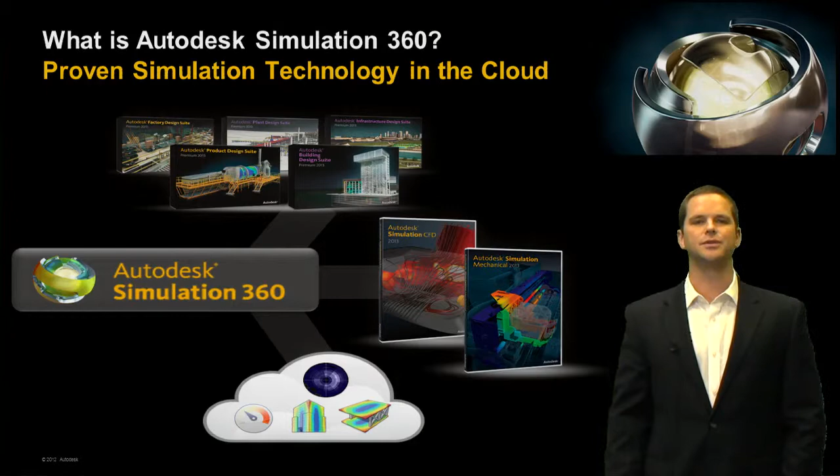So Autodesk Simulation 360 connects to our design suites and to our optimization, energy analysis, and structural tools. But we'll focus on this for this episode on Autodesk Simulation CFD Motion, which is our highest level CFD solution, giving you flow and thermal studies, radiation, smoke, and also flow-driven motion and motion-driven flow, and our Autodesk Simulation Mechanical solution, which gives you linear and non-linear stress analysis as well as fatigue and mechanical event simulation.

So why do our customers use simulation, and why do they use Simulation 360? Well, it's all about gaining a competitive advantage. So we've democratized simulation in order to level the playing field, and by using infinite, elastic, flexible, and scalable computing power within the cloud, we've placed optimization within the reach of the masses.

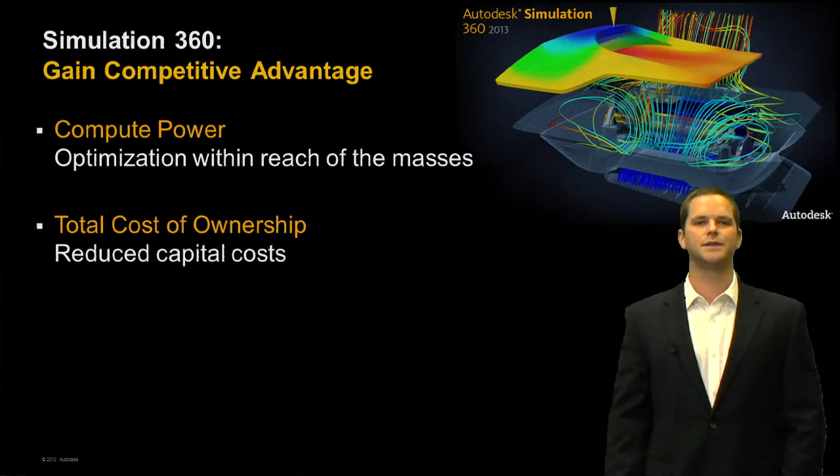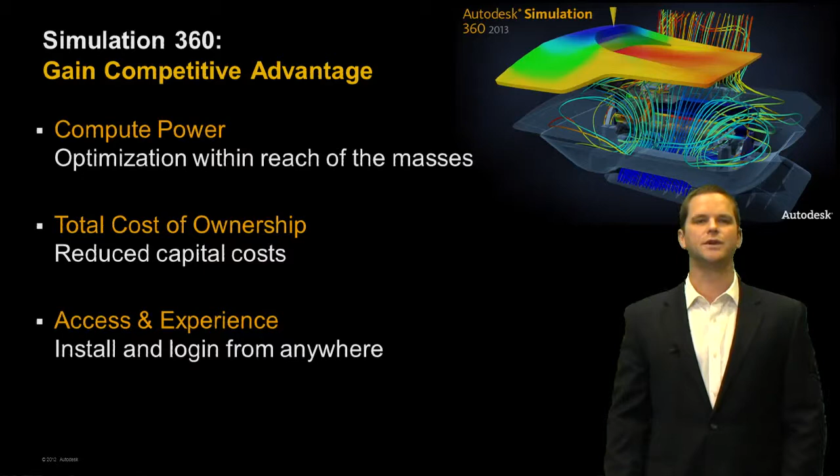It also lowers your total cost of ownership dramatically. So we're helping our customers reduce their capital costs and migrate to a more pay-as-you-go style model. So again, it's all about the access. And lastly, the experience and the access, being able to install and log in from anywhere, is something that our customers expect and demand. So this gives you that capability as well.

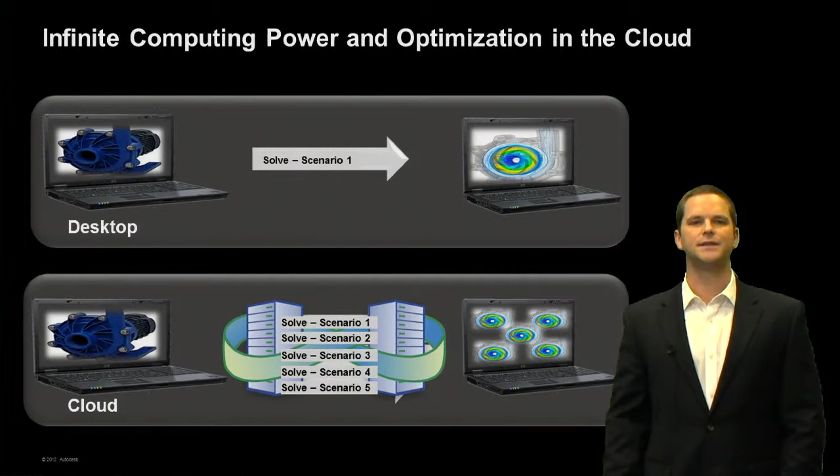Okay, so what is infinite computing power and optimization in the cloud, and what benefits does it provide you? Historically, our customers have run a single desktop simulation, looked at the results, run another one and compared them. Well, now you can run an unlimited number of design scenarios simultaneously. So you're essentially stopping the clock on time to market or time to project completion and evaluating an unlimited number of designs, choosing the best one and moving forward.

So one of the most common questions we get is, how is my data protected? Of course customers want to understand what type of protection measures are in place to protect their intellectual property. So there are three main pillars, and I'll cover this at a high level, and then we'll have an additional episode that covers security in detail.

The first pillar is information security. This is how we protect your data while it's in transit, moving to and from the cloud, and also how we safeguard any static data that's stored on the cloud servers. With simulation, none of the data is stored on the cloud servers unless you choose.

The second pillar is physical security. This relates to the physical safety procedures for the building. It includes protection from theft, vandalism, and natural disasters.

And the last pillar is operational security. It's procedures in place to monitor anyone who has access to the cloud server, with very strict security protocols that they have to follow. Ultimately, we're using the ISO 27001 standard, which is the exact same standard with audit capability that banks and lending institutions use. In addition, we're using the HTTPS secure protocol.

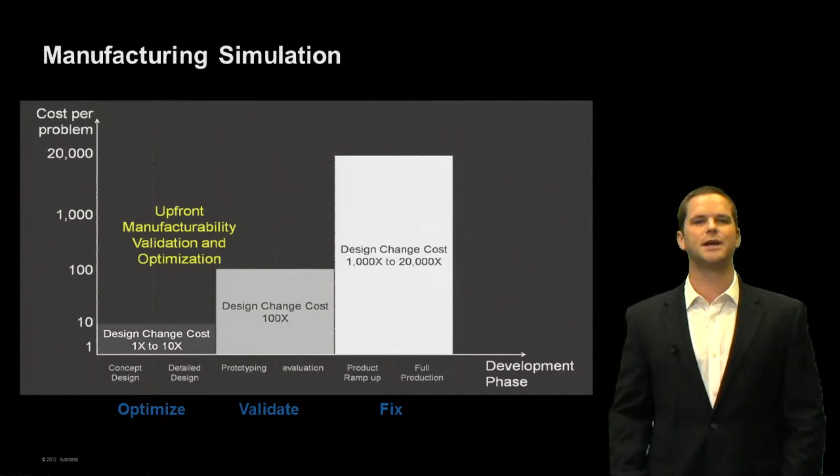Okay, so now let's look at some customer use cases and understand why our customers use simulation. On the manufacturing side or product design side, it's all about the upfront manufacturability. If we look at this bar chart, as we go from left to right, the cost of design changes increases logarithmically. So we want to enable our customers to make design changes upfront and early in the design process when they're the least costly and the most impactful.

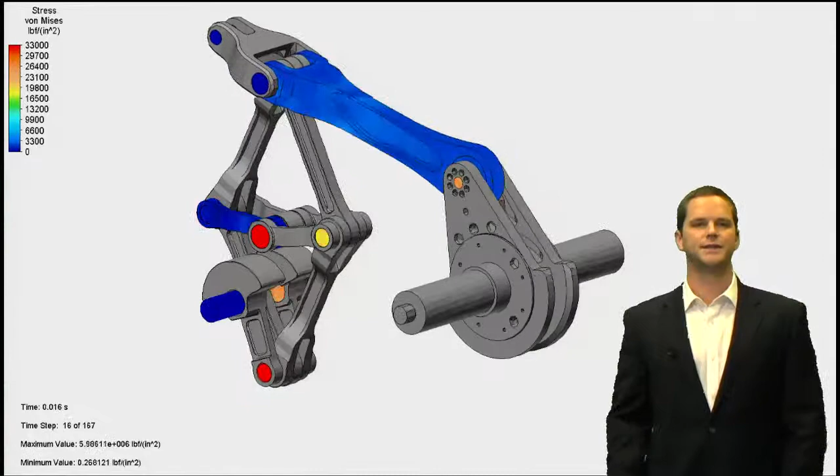So let's take a look at a specific example now. This is a linkage gear which translates rotational motion into linear motion. In this case, Simulation 360 can be used to run many different design studies on this very computationally intensive type of simulation simultaneously. Historically, again, we'd run one at a time. Now we can look at different materials, different designs, different rib sizes, and even different speeds and frictional loads to make sure that our design performs as expected.

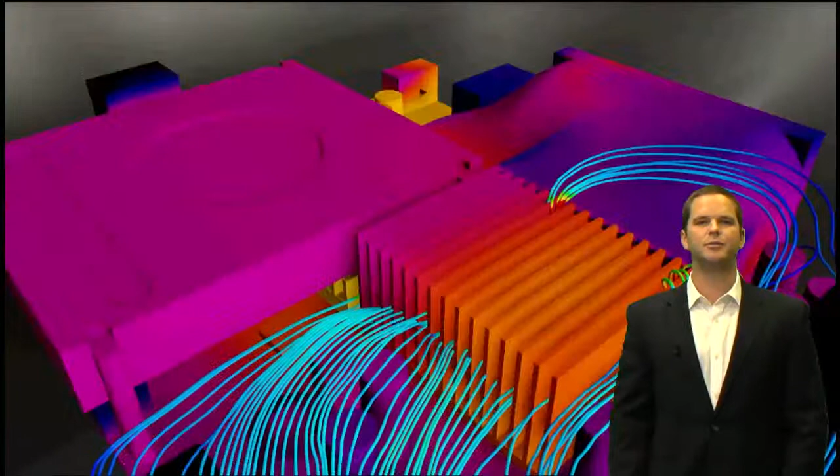How about on the electronics side? In this case, we can use Simulation 360 to understand the effect of different inlet or outlet placements, different fan sizes, varying the heat sink fin spacing or heat sink material, evaluating different chips, and placement of components within the box. So we're using Simulation 360 to evaluate wildly different design concepts and drive down the junction temperature of the chip to increase reliability and reduce risk.

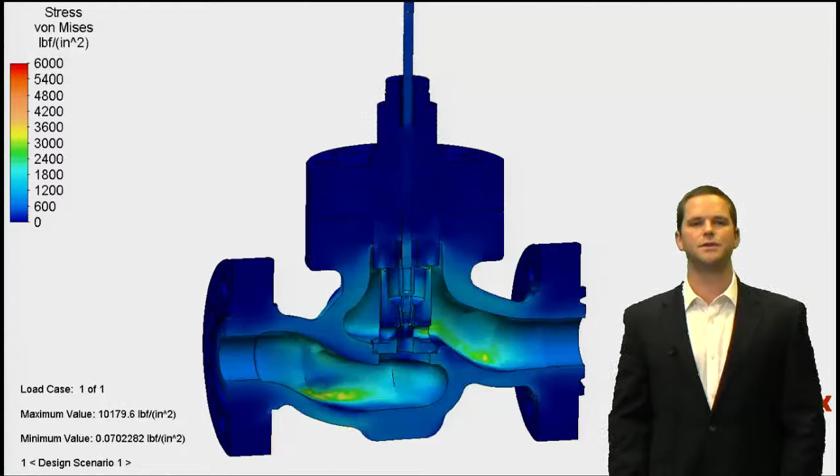On the industrial machinery or flow control side, we can look at pressure tests or burst tests of valve assemblies, or look at stresses on pump components. So in this case, we're using the cloud, or Simulation 360, to study the effects of different pressure loads on the fluid moving through here, different wall thicknesses or material types, and maybe even evaluate the effects of erosion. That's more on the manufacturing and product design side.

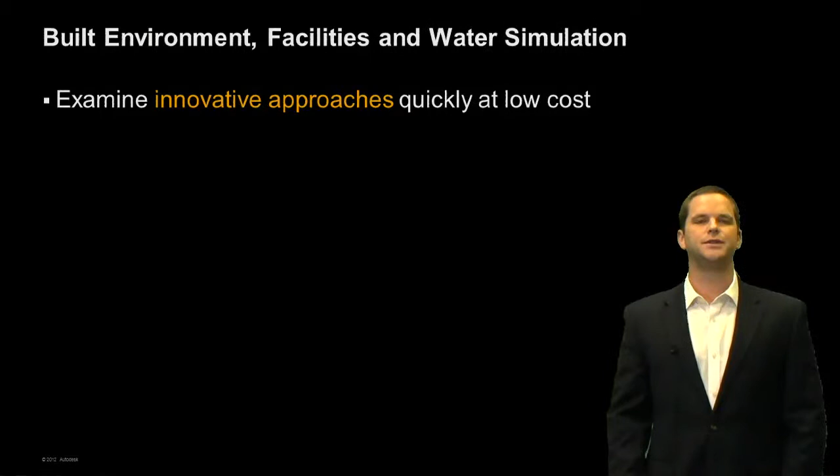How about our clients working in the built environment, designing facilities, water holding tanks or storage facilities, or providing services to their clients? They use simulation to examine innovative approaches quickly at very low cost. At this scale, it's impossible to build and test, so digital simulation is the best method for optimization. They also use it for high-performance, sustainable building design, whether it's saving on ventilation costs, increasing safety, mitigating environmental impacts, or looking at seismic or wind loads on a building, facade, or curtain wall.

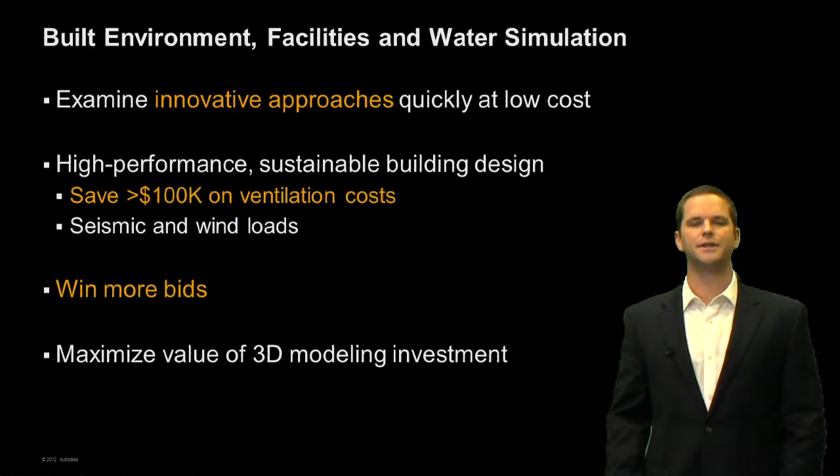They also use it to win more bids, so when they go into bidding competitions, they'll differentiate themselves with this core competency and technology. And lastly, maximizing the value of the 3D modeling investment they've made. So no matter what BIM or CAD tool they use, they'll use simulation to recycle or leverage that data. Here are some more specific examples.

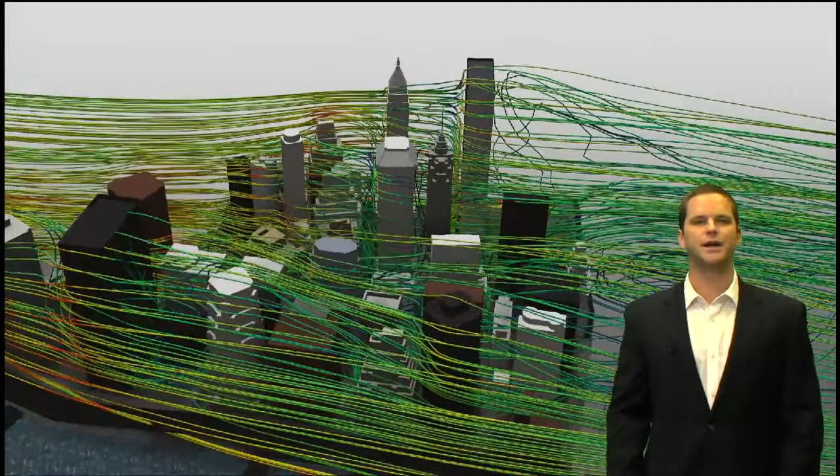This is the financial district in downtown Manhattan. In this case, we could use Simulation 360 to look at varying wind speeds or wind directions. If you look at a wind rose, there are several prevailing wind directions and speeds for each throughout the year. So we want to look at maybe the top three cases and understand the effects on the buildings, pedestrian comfort, any high pressure loads, and the loading on the walls.

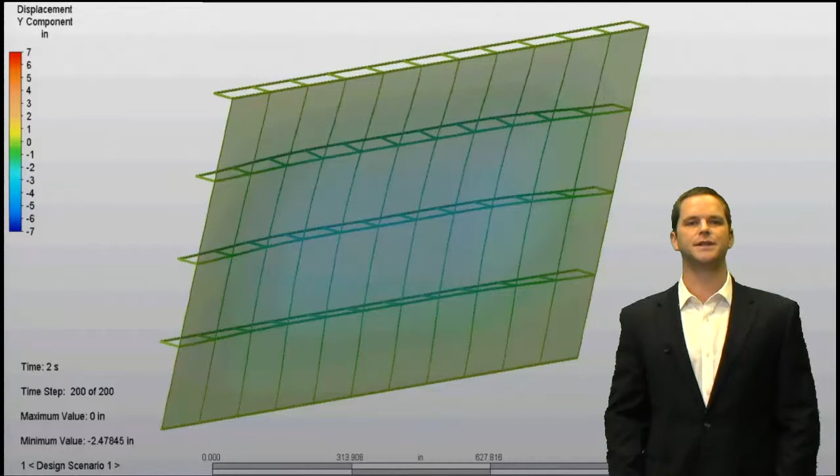Here's a curtain wall, maybe on one of those buildings. In this case, we'll use 360 to run a fairly computationally intensive study on several different designs simultaneously, pushing all of that computing power up to the cloud to rapidly simulate this. So we can look at the structural effects of the wind loading on this particular design.

Okay, how about in factories? In factories, we'll use 360 to look at different ventilation setups, vent or diffuser or supply grill placements. We want to make sure we're properly ventilating the space, not over-ventilating or under-ventilating certain areas, and that we're mitigating any contaminant or pollution effects as well.

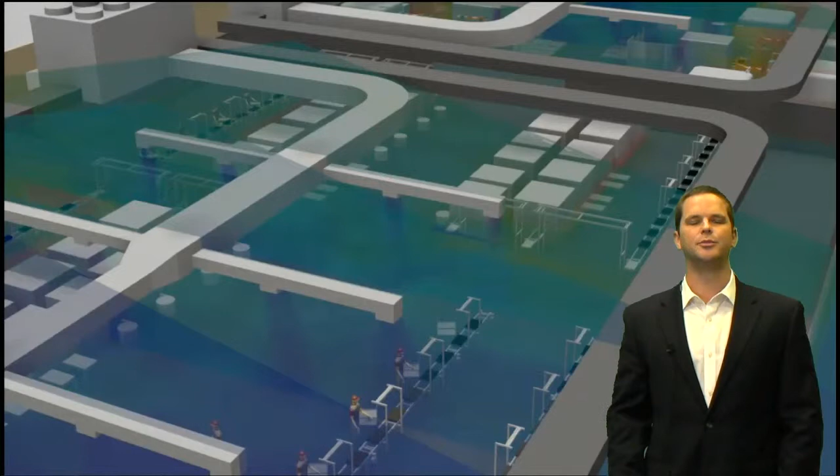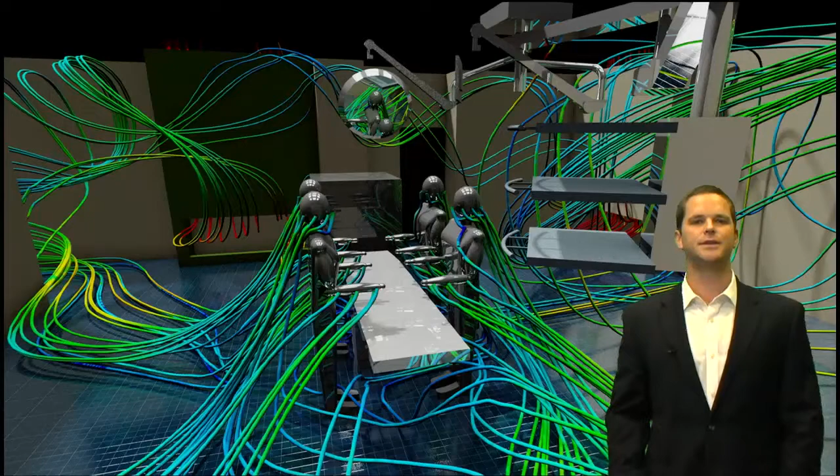How about in the healthcare industry? Hospitals and clean rooms face some fairly common challenges. They want very predictable laminar airflow. In this case, we can look at different diffuser placements or designs, different filter setups, different patient locations or manufacturing processes, and how the equipment affects the airflow, again studying those simulations simultaneously using the power of the cloud.

And how about data centers? Mission critical data is stored in data centers around the world. We want to use Simulation 360 to reduce our energy consumption and minimize our redundancy while still maximizing the factor of safety of our design, ensuring that we have cooling air provided to the server racks that need it the most.

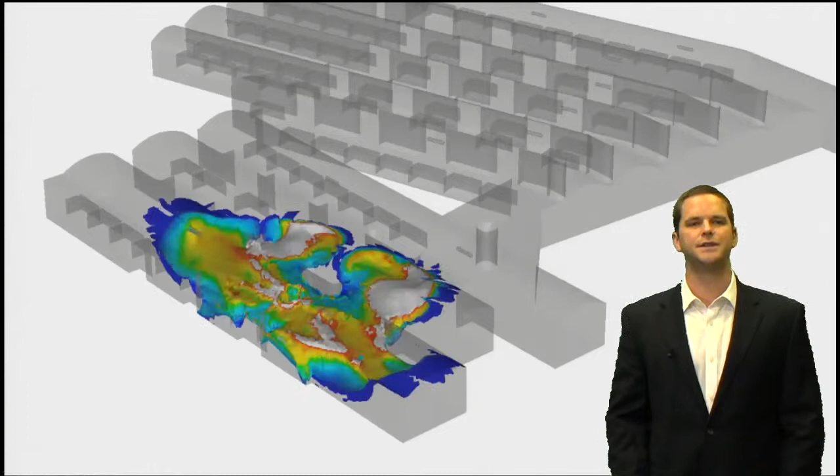And lastly, here we'll look at a smoke study. Again, it's very computationally intensive to study a fully transient smoke scenario and understand how the ventilation system or makeup air system, as it turns on, will perform and how it purges the space of smoke. Very computationally intensive simulations, so we want to send this to the cloud, and maybe study different makeup air system sizes, different capacities, or different fire locations within a building, subway, train station, etc.

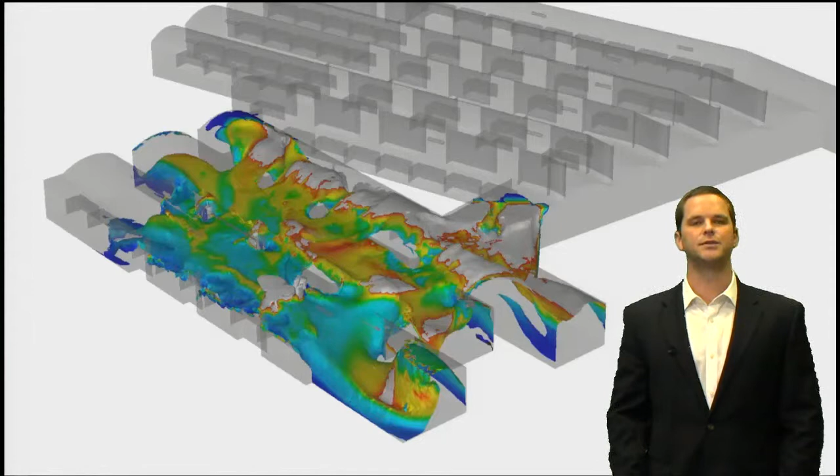Okay, so that pretty much concludes the high-level overview of Autodesk Simulation 360. It's fast and accurate, flexible, affordable, and secure. We're providing those flexible, scalable, infinite computing resources to you. We're also providing the desktop ownership of the tools and trying to really change your business model, allowing you to effectively simulate and bring products to market or building designs to completion as quickly as possible.